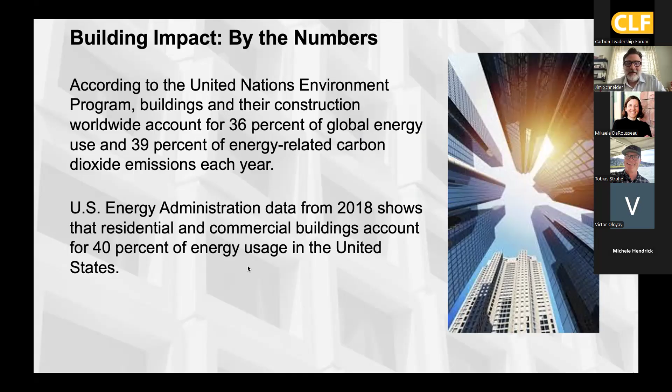We have lots of reason as a built environment to really be paying a lot of attention to our impacts, our long-term performance, and how we interact with the environment around us. The built environment has a significant impact on carbon, on energy, on materials. And so we really have to think about how we better use all those things in a way that is useful to the built environment of the future, but also works in harmony with communities and the environment.

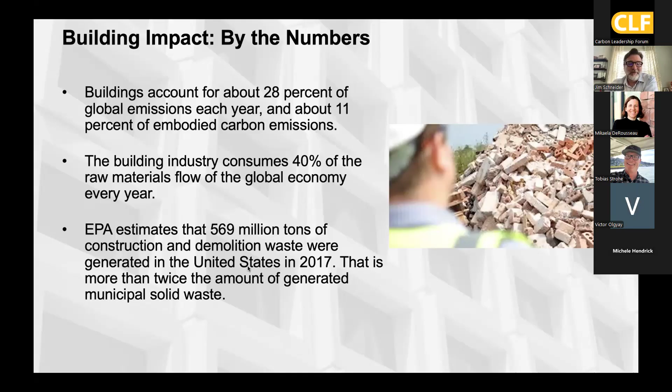Buildings account for about 28% of global emissions each year. The building industry consumes about 40% of the raw materials flow of the entire global economy. EPA has estimated that 569 million tons of construction and demolition waste were generated in the US in 2017. That's more than twice the amount of generated municipal solid waste in that time.

So for those reasons and many others, I think we have to think about buildings and materials a little bit differently. It's both in the initial impact of it and also the durability, the adaptability of the long-term performance. Statistics, just a few of them listed here that I'm sure are no secret to anybody out there. We are seeing an increase in severe storms and in fire damage to buildings. So buildings are facing more stress.

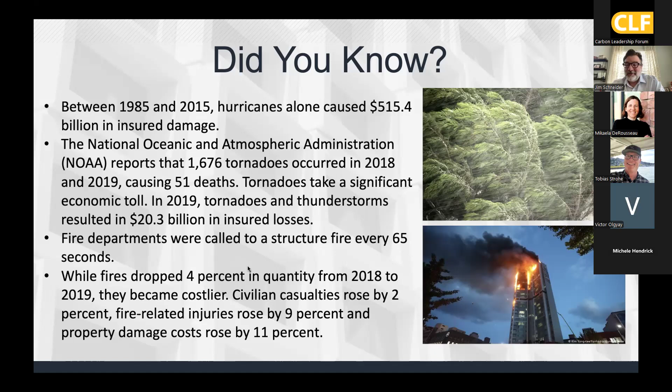And while they're doing that, the fact that buildings are creating this environmental impact through their energy use and through their materials is creating some of the environment for climate change, which is creating the environment for more severe weather and fires. IPCC reports in recent years show that as well.

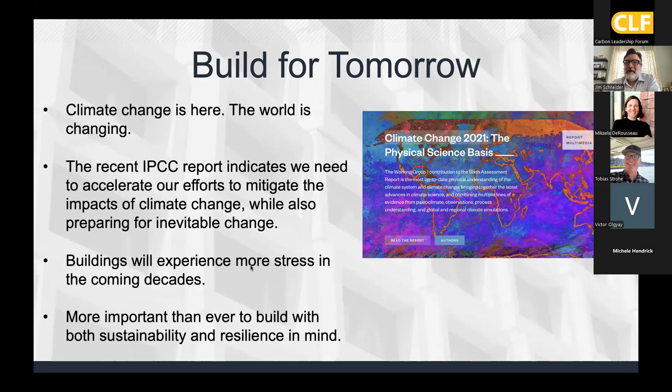So essentially, I think we have to really think about how we build for tomorrow, which is both taking into account how we mitigate the impact of climate change and also how we respond to what is already happening. We have to be thinking about climate adaptation and other pieces of the equation, as well as trying to mitigate our impact.

So some of the ways that precast, pre-stressed concrete can help in a sustainable design, and I'm somebody who believes that it's really the design and how you utilize materials is a big part of the equation on what makes a building quote unquote sustainable or resilient. And so there are benefits and attributes of precast and of concrete broadly that can really help in a sustainable design. And some of them with precast, pre-stressed concrete are the fact that it is an offsite construction method.

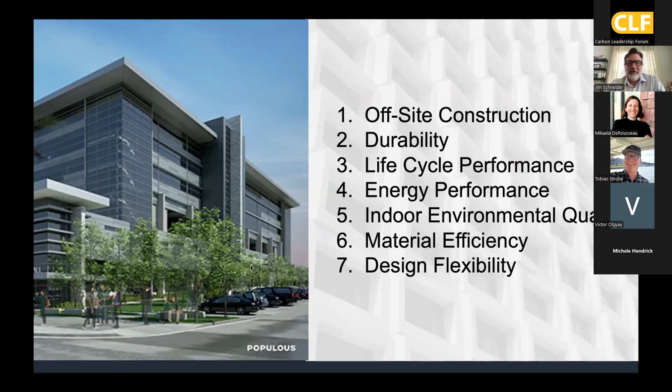So there's a lot of efficiency there, very durable and long lasting life cycle performance. So you get some of that long lasting, resilient, adaptive type of performance. Good energy performance, good indoor environmental quality, material efficiency, and design flexibility. So what I'm starting off with here is a few of the things that we've talked about as an industry for a while that are well-known benefits of using this type of material.

And one of those can be energy efficiency, particularly when we're talking about precast pre-stressed concrete. A common component we use is an insulated sandwich wall panel, which is where you have an interior and an exterior wythe of precast pre-stressed concrete with a layer of continuous insulation sandwiched in between.

So really, when we're talking about how we create energy efficiency in a building, it's by managing that thermal energy flow, that heat flow. We do that by using insulation, and then also by eliminating thermal bridges and making sure there's no metal going through the envelope system that creates cold spots that can lower the overall performance of the wall. Make sure you eliminate air and moisture leaks. And as a bonus, with concrete, you can utilize the thermal mass.

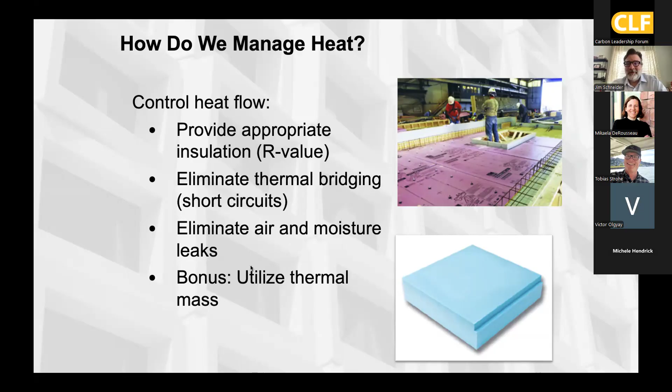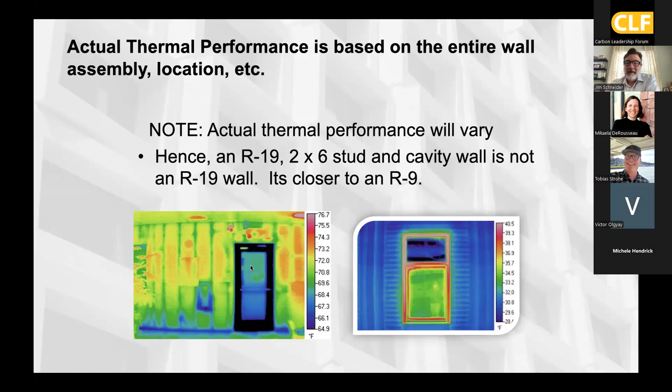Now, with a precast sandwich panel, we use non-conductive ties that hold the whole thing together so we don't get that thermal bridging. You have insulation built right into the system.

And then thermal mass, I'm just briefly touching on some of this stuff, and if anybody wants to go deeper into it, I'm happy to connect afterwards. But essentially, thermal mass is the quality of concrete where it acts sort of like a thermal battery. It slowly absorbs and slowly releases heat.

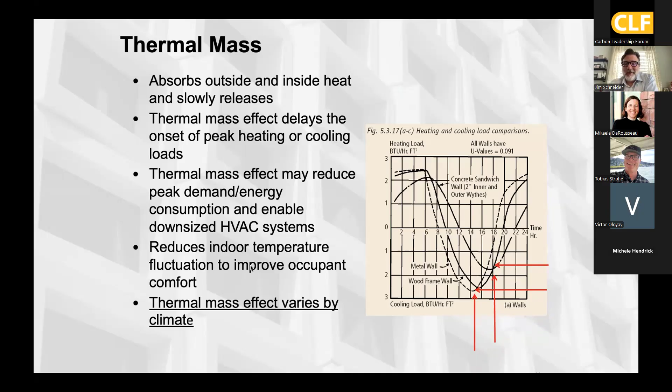So what it can do to the performance of a wall system is shove the peak heat load to off-peak hours for electricity, so it's cheaper. And more importantly, it actually makes the peak smaller. This comparative chart actually shows a few different wall systems, that smaller peak being a precast insulated panel. And so what happens is it creates more even temperature. The HVAC doesn't have to work quite as hard. So there are some physics benefits that you can actually calculate and factor in with precast.

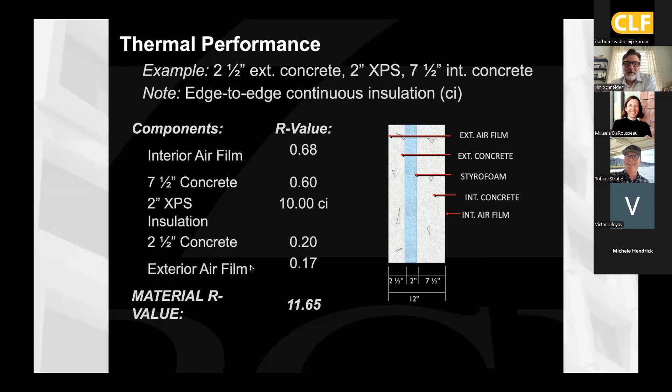And this is an example of a precast sandwich wall panel, what its material R value might look like. Because the material itself, whether we're talking about concrete, steel, wood, anything, doesn't really give you much insulating value. It's obviously the insulation part that does. When you add all these together just as individual parts, you get that material R value of 11.65 for this sandwich wall panel.

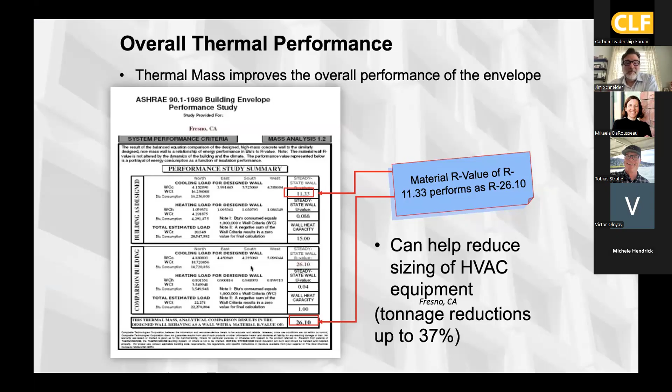And this is actually from a case study of a project in Fresno that utilized the sandwich wall panel much like that, and then ran the thermal mass calculation and showed that that wall actually performed at R 26.1 rather than the 11.33 of its material R value. So it almost doubled the effective R value of that wall. And in that case, they were able to downsize their HVAC by 37%. So those are some of the examples of how precast can be used in an energy efficient manner.

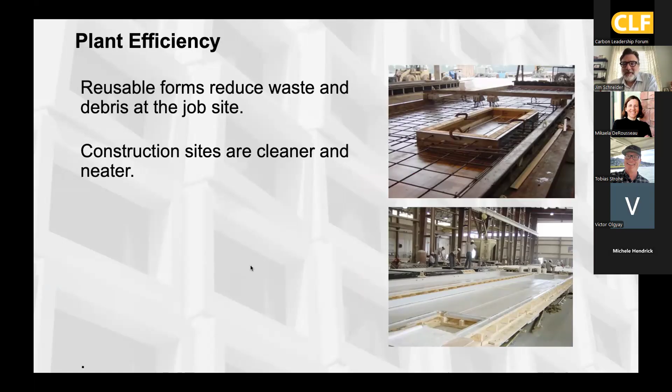It's also very materially efficient. As concrete goes, it is plant produced. So under very controlled conditions, where that comes to mix and just the amount of materials used, there's very little waste. So it creates cleaner, neater construction sites, a lot less room is needed for staging on the site. It's a very efficient off-site construction method. We use steel forms to cast structural products, so those are used over and over again. You get a lot of uses out of those.

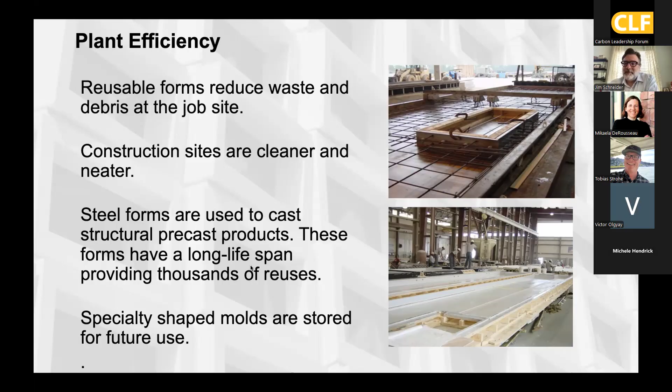Specialty shaped molds are stored for future use. It's usually amortized by how many pours we're going to have in a particular form, the type of material that's used, to make sure we get the most efficiency out of it for both economy and environment. It can be recycled and reused, crushed down and used for things like road base. And we're even seeing some work being done that I'll touch on later about trying to use crushed concrete as partial aggregate replacement in new concrete.

But we can also be engineering for adaptive reuse of components as well. And one really cool example of that was the Olympic Stadium that was built in Atlanta back in the 90s for the Olympics. It later became Turner Field. But they actually designed it with a number of riser sections that were designed to be removed after the Olympics and transported to local high schools for their athletic facilities.

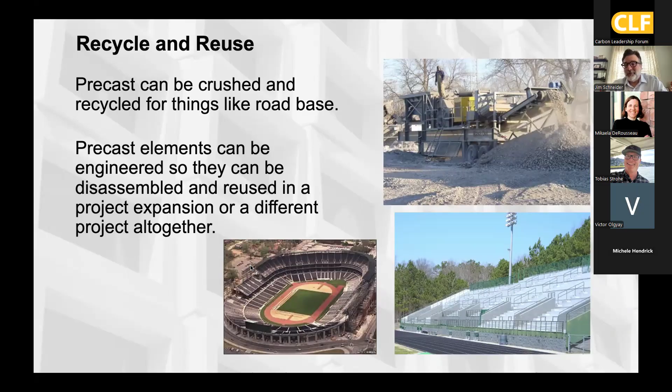So there's potential of doing things like that, or kind of future-proofing different designs for precast to reuse them, as parking structures that can be designed with certain floors to be retrofitted into office later, those kinds of things. So it offers some flexibility in that respect.

And then resilience is an important part of the equation. I think the more we talk about truly sustainable design, we're also talking about resilience. We're talking about climate adaptation. We're talking about a building that can stand the test of time and hold up against the conditions that already exist and that will inevitably become more severe over time.

So a resilient building delivers long and effective service life, provides safety and well-being to occupants, which is really the first responsibility of any building, can effectively resist hurricane and tornado force winds, earthquakes, fire and blast incidents, minimize disruption and recovery time, provide sufficient functional resilience to ensure continued performance even in the face of an environmental challenge or disaster, and provide benefits for insurance over the long term.

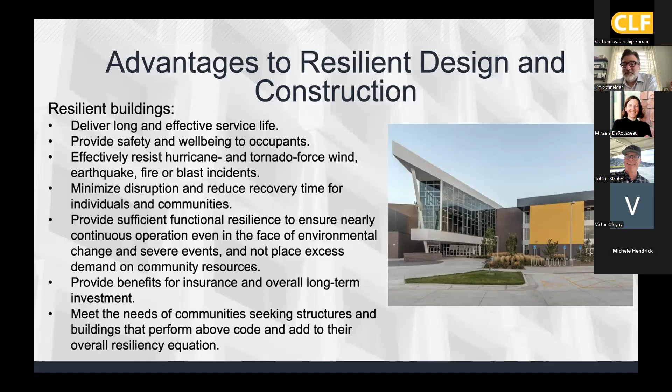And we're starting to see a shift in that industry and more demand for resilient construction, and meet the demands of communities that are seeking structures and buildings that perform beyond code, something that isn't just the bare minimum, but something that you can really rely on and use into the future.

So precast, pre-stressed concrete is a very strong, durable material beyond some of its initial upfront benefits. It just does last for a very long time. It stands up really well against fire, against storms, all kinds of things that can happen to a building.

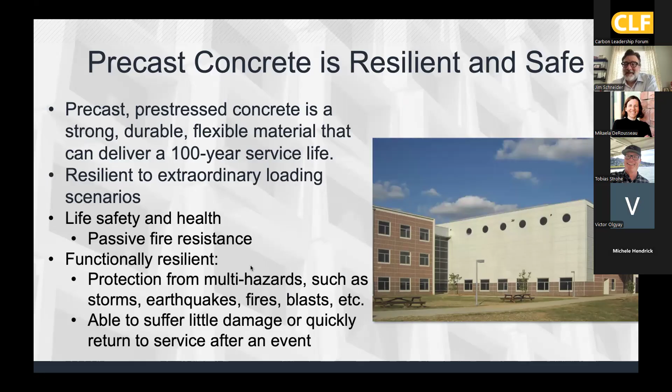In terms of storm resistance, we see it very often used for FEMA storm shelters, which sometimes have been built into school gymnasiums or things like that that can be part of a community design. So it is a very strong, durable material, provides excellent protection against high winds, storm surge in hurricane zones, different types of weather conditions that can affect it, which is why it is used in those types of designs.

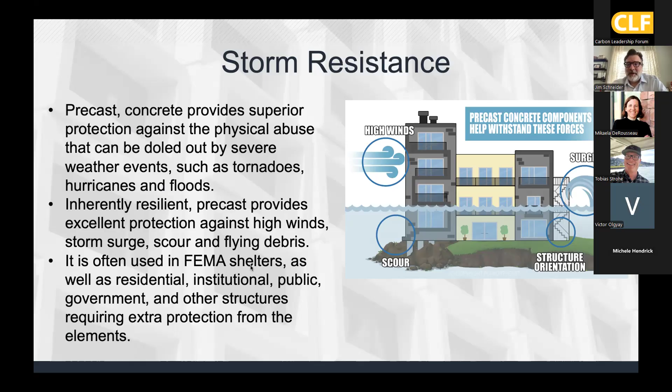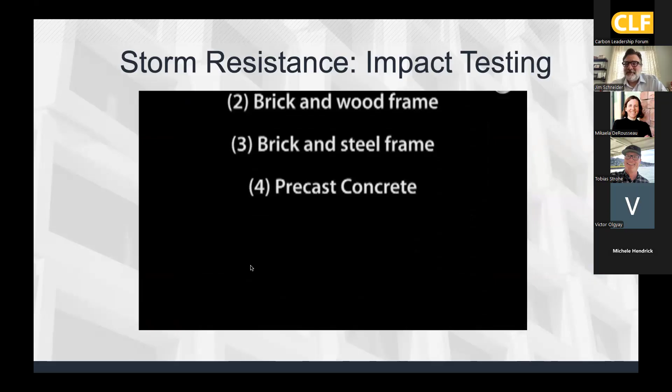And the kind of illustrative video that we have from the industry research that was done years ago in this area was that we did a wind cannon test to see what a couple of different wall systems would look like in the event of like an EF5 tornado where you have 100-mile or whatever it is mile-an-hour winds. So this was actually a wind cannon test shooting a 2x4 at 100 miles per hour through or at a couple different wall systems. That was a vinyl wood frame, and you can see it punctures that pretty easily.

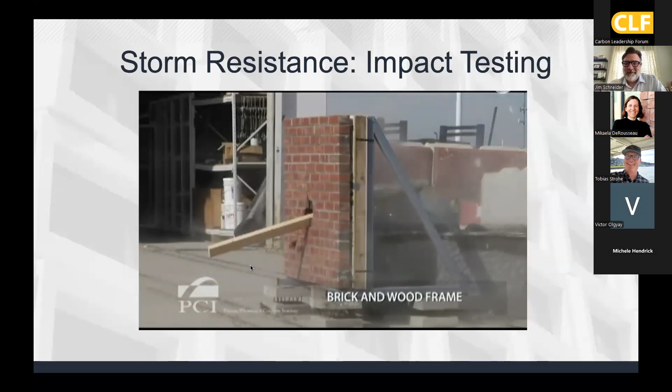Brick and wood frame. It also creates a little bit of resistance there, but still gets through and damages that building. And next is a brick and steel frame. Effectively sharpens the projectile and makes it more dangerous. So that's no good, but still doesn't stop it from penetrating the building. And then we have a precast insulated sandwich wall panel, and you can see how it basically just bounces off. Like if there's any damage to that wall, it's aesthetic and it's a touch up.

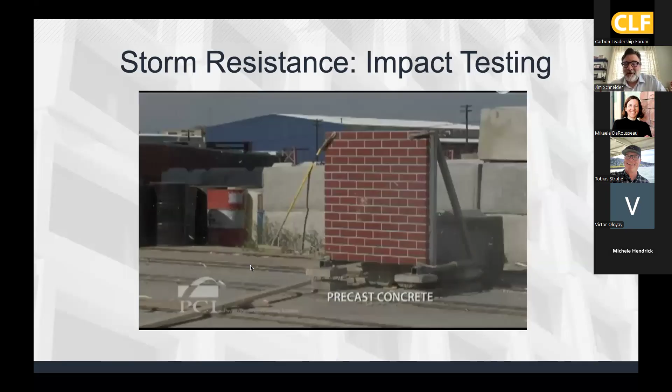So first of all, the people inside were kept safe. And secondly, the building's able to continue functioning, which to me is kind of the definition of resilience. Durability is the capability of a building, a material, a community, a person to take an impact, to take a punch. Resilience is taking it that next step and saying, can you continue to function? Can you still continue to do your job and move forward after that?

And one example of this, kind of the resilience and adaptability of the material, if anyone remembers the tragic tornado that struck Joplin, Missouri back in 2011, that was national news at the time. And it pretty much destroyed that town. It was a significant loss of life and property. But one of the buildings that did survive that storm was this 96,000 square foot Shopko. It was a precast big box space that really hadn't been used for a number of years. They were able to retrofit that into the new Joplin High School in just 55 business days.

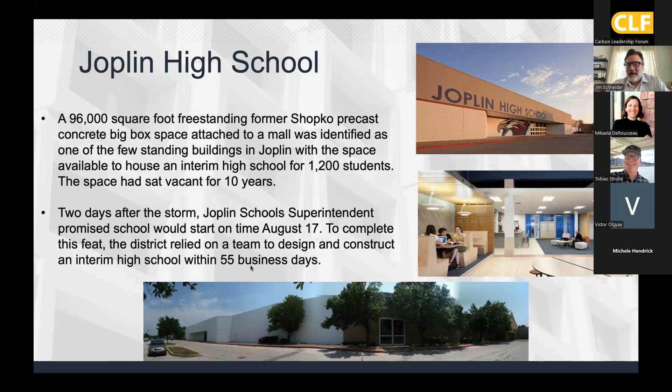So, to me, that's a story of adaptability. The material is able to change its use of that building pretty quickly and easily. And those students were able to return back to school on time. So that sort of is the true definition of resilience, where that piece of the community's activity was able to continue as normal in the fall in just a really quick amount of time. At least they had that piece of normalcy to cling on to. And the entire town was rebuilt in resilient and sustainable fashion after that.

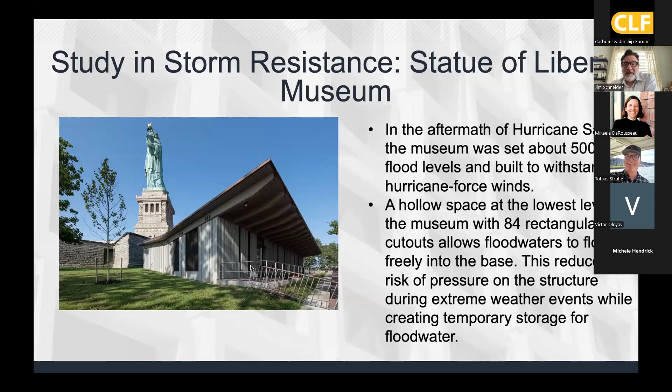Just another kind of interesting example of designing for climate adaptation and thinking ahead for the future is a Statue of Liberty Museum that was designed in the aftermath of Hurricane Sandy. So, a number of things they did here was set it above the 500-year flood levels. Hollow space at the lowest level of the museum has 84 rectangular cutouts that allows flood water to flow into the base, and that reduces the risk of pressure on the structure.

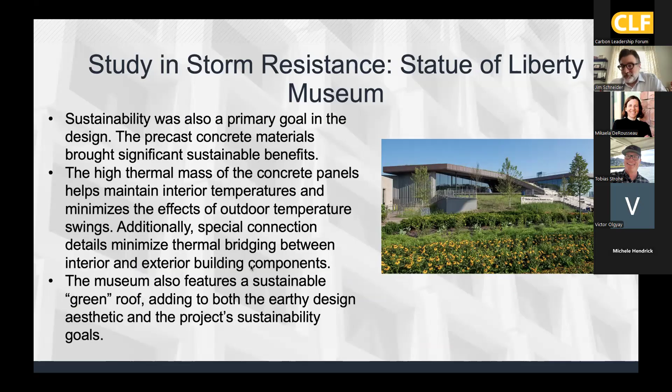Sustainability was a primary goal here, and they used insulated sandwich panels and thermal mass to achieve some of the energy performance they wanted. Also, a green roof, which precast was a part of that design as well. So there were a lot of ways that precast was able to help make that design possible, and it was LEED certified, and I'm forgetting which level, but it was designed both for sustainability and for thinking to the future and the kinds of weather that an East Coast facility like that is going to have to deal with over the years.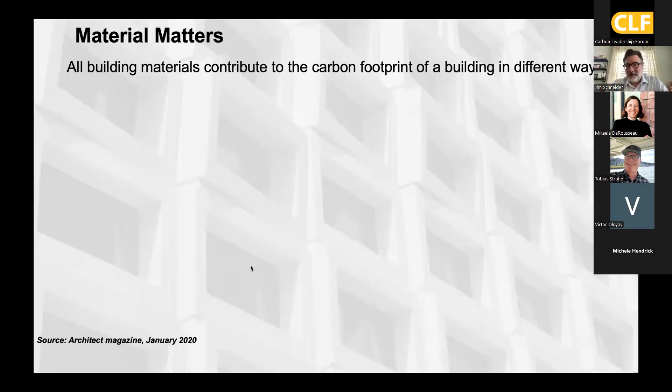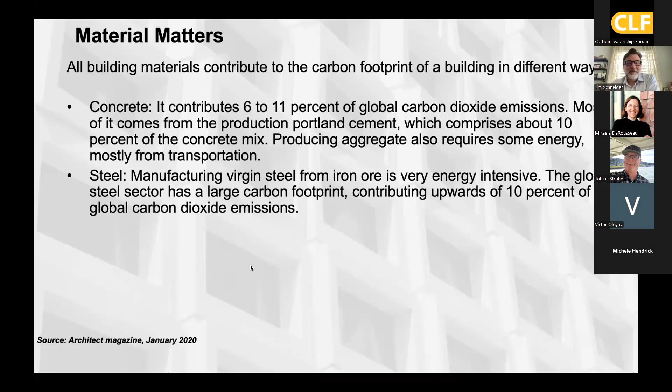And of course, we talk a lot about and have for many years about the long-term performance benefits of precast concrete. There is, of course, an embodied carbon element to it that is part of the equation. And really, materials in general do have impacts in this area. So we have to kind of think about the initial impact and the long-term impact. With concrete, the material as a whole contributes 6 to 11% of global CO2 emissions. Most of that comes from Portland cement. We're going to talk more about that a little bit later in the presentation. Steel, also very impactful in this area, about 10% of global CO2 emissions. Wood, it's a little bit more wibbly wobbly.

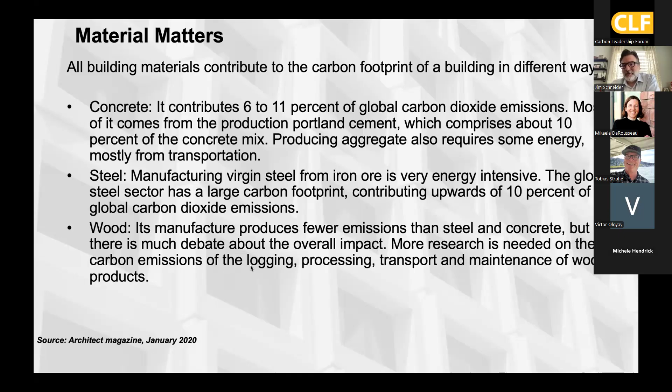There's less initial or easily trackable emissions, but there are things that come from biogenic carbon loss, transportation, and other things like that that are beginning to be identified. And this is just from a study from the International Institute for Sustainable Development that went into some of the difference between upfront and long-term impacts in terms of carbon from different types of materials.

And what you can see in this is obviously that light blue manufacturing impact is higher, with a higher carbon impact of concrete over wood. Construction a little bit higher as well. They start to factor in biogenic carbon loss with some of the wood products there, and that evens it a bit. And then you start to factor in the use phase, where approximately 95% of the impact of a building in terms of carbon and energy comes from its operation and its use over time.

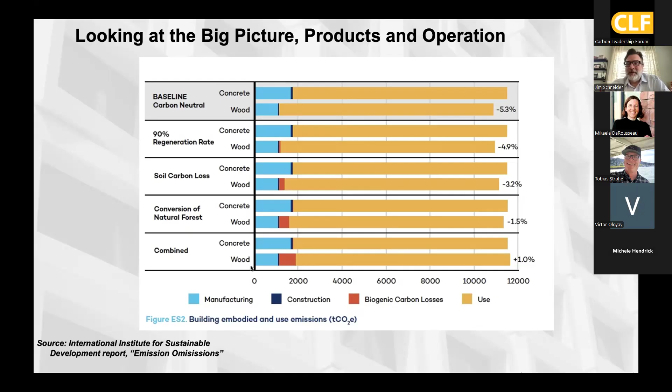So when you start to factor that in, there are benefits of a material like concrete that can, over the long term, balance the ledger a little bit. So essentially what it gets down to for me is that all building materials have an impact. It all has a cost. And how do we leverage that and utilize it the best way possible to get the long-term performance that we're seeking, as well as mitigate its impact up front.

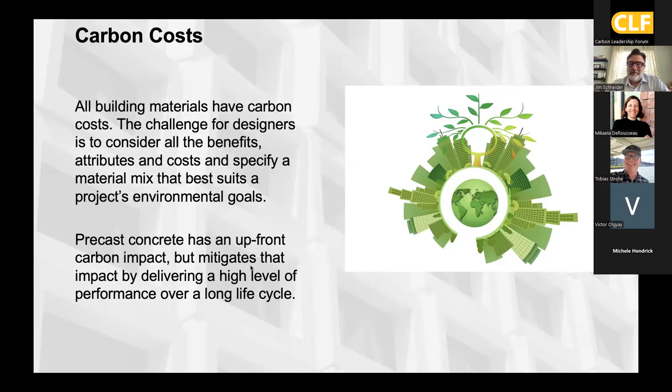Precast and concrete as a whole does have an upfront carbon impact, and that is somewhat mitigated over the life cycle by its performance. However, that being said, we also recognize the importance of doing something about the initial embodied carbon and trying to change the metric there and bring down that impact so that it can perform even better and be an even more impactful building solution for us into the future.

So next, I'm going to talk a little bit about where we are as an industry when it comes to reporting and transparency, and getting into the TLAs, as I like to call them, the three-letter acronyms: PCRs, LCAs, EPDs, and everything else. So where we are, there is, of course, overwhelming scientific evidence the Earth's climate is changing. We all know climate change is affecting the planet and we have a role to play in reducing the emissions. So why do we focus on concrete?

I talked earlier about the fact that the built environment, construction in general, has such an enormous impact by percentage around the world. This pie chart shows the different impacts from a carbon standpoint. Transportation, everyone always thinks about cars, but it's 23% versus building operations, which are 28%, materials and construction 11%. So it's a big deal. We have a big footprint, and any impact we can make in improving it really does change the dynamic around the world.

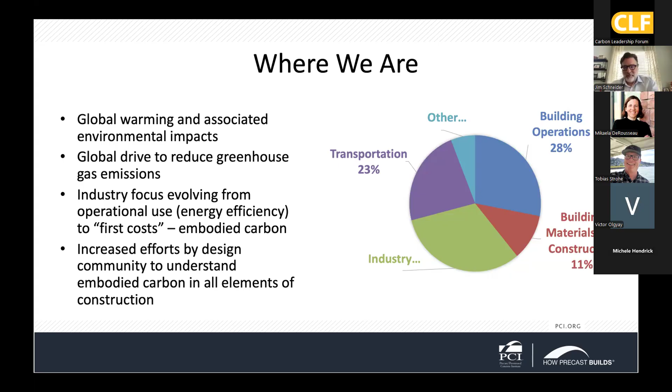So cement is the main driver of the impact of concrete. If we could have a magic wand and somehow make concrete without cement at all, that would be great. And maybe someday we'll get there. In the meantime, we are trying to find ways to use it in a more efficient way, to find ways to replace it that still give us the performance that we need and deliver the aesthetic, the versatility, the performance, and all those things that we want to see in concrete too.

So in the current state, we are seeing an evolving awareness and focus on how we even think about buildings and how we think about quote unquote sustainability, which is a term that's kind of going out of fashion. And that's maybe not a bad thing, because we really can think about what is the most effective way for us to build. I don't think we're ever really going to move the needle super far by trying to make it an altruistic thing. What it really is about is doing buildings better, doing business better. How do we do it more efficiently, less impactful, and coming at it from that direction?

So we want to understand the environmental impacts of our material and our industry, especially where cement is concerned, and figure out how we work that. And the perception of concrete is a notable thing. I run into this all the time. There's plenty of folks who just think concrete on its face is bad, and there's plenty of reason to think that, but there's also plenty of reason to think that it has a really important role to play. There's also a lack of clarity on the differences between different types of concrete, because there are different types of concrete, and how we use them and how we create them.

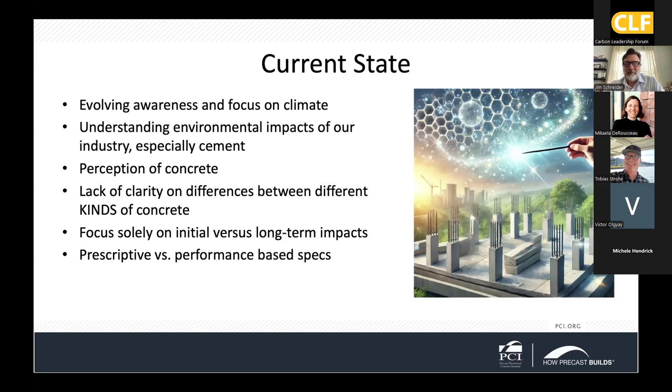Focus on initial versus long-term impacts. Both are important, but we really do have to factor the whole thing into the equation. And then prescriptive versus performance-based specs. We as an industry really think there is the benefit of performance-based specs, which is getting to that point of saying, here's how we want it to perform, and then we'll let the producer or designer get to that point the way they need to get to it, rather than setting the actual material targets that may not be relevant or may actually be a hindrance to getting to the kind of performance you want.

There are lots of industry efforts to decarbonize cement. Portland Cement Association has released a roadmap to carbon neutrality. Global Cement and Concrete Association, CLF, right there. And our own industry, PCI, has been putting a lot of effort into this for a long time. I worked at PCI National back in 2004, and I want to say it was maybe 2006 that we formed our first sustainability committee there.

That has really taken on a new life in the last several years and has become very active at a board level, even in our organization, where it's kind of become a priority all across the board, which has been part of our big push to gather industry data and EPDs and have this transparency. So we as an industry have invested a lot of time and energy into producing EPDs, tracking carbon and talking about sustainability among ourselves and to the outside world because the market demands it.

Policy environment is requiring it. Architects and engineers are looking to design lower carbon buildings. Owners and developers are setting climate targets and embedding sustainability into their governance practices. And governments at various levels are enacting buy clean policies that require EPDs. We certainly have that right here in Colorado.

Here in Colorado, we can take pride in the fact that we're the first Department of Transportation in the country to have required EPDs, and we're a leader in many ways here. So it's been a good inspiration for our industry to respond to that and really push forward on getting a good state of where we are. And then, from there, we can build on where we're going to go.

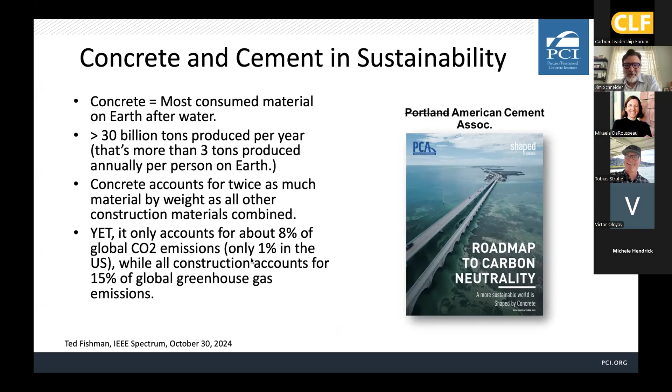Concrete accounts for about twice as much material by weight as all other construction materials combined. Yet it accounts for only about 8% of global CO2 emissions. So part of that big number in emissions is from the fact that we just use so much of it. So once again, being able to change the mix on that and get to a better place, any improvements we can make in concrete can make a really big difference worldwide.

So talking about an EPD, I'm sure most folks here are probably familiar, but just in case you're not, the process essentially begins with a product category rule, or PCR, which sets the rules, calculation requirements, and guidelines that get you to a life cycle assessment, or LCA, which is the method to assess the environmental impacts across a product's life cycle. That gives you just a ton of data that is really kind of difficult to make sense of. And so that is boiled into an environmental product declaration, or EPD, a third-party verified, internationally recognized label that has a public disclosure of life cycle environmental performance based on that LCA.

So let's take a look a little more closely at what's measured in an EPD. Most published EPDs follow what's known as an A1 through A3 scope. You'll often hear this referred to as cradle to gate. That means capturing all the environmental impacts that occur from the time the raw materials are extracted, for us primarily cement, aggregates, and steel, all the way through to the end when you finish the precast element and it's loaded for shipment at your plant, which is the gate.

So that scope includes A1, which is raw material extraction and upstream production, A2, transportation of those materials to your facility, and A3, all on-site manufacturing and assembling processes, including batching, casting, curing, and any reinforcing work.

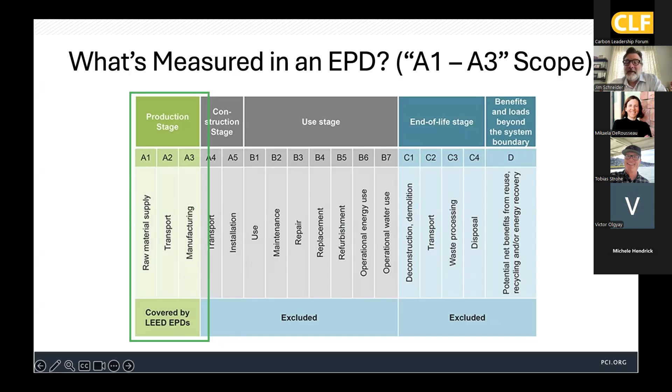And the A1 to A3 scope is where the majority of embodied carbon in most products comes from. For us as precasters, that's mostly the steel and cement that goes into the material. So how do we get to this raw material? This is where the LCA comes in. Each EPD is built from a complex calculation that models the environmental impacts of producing 1 unit of a precast product from cradle to gate.

How producers input real operational data: we have a tool that we're using as an industry through WAP that a lot of our members are using. A few others have done others. But it'll input data like how much cement, fly ash, slag, rebar, aggregates are used, what kind of energy sources run their plant, how far do materials have to go to get there. That all gets processed through the software and matched with a life cycle inventory database like EcoInvent, which contains upstream environmental impact factors for each material in the process.

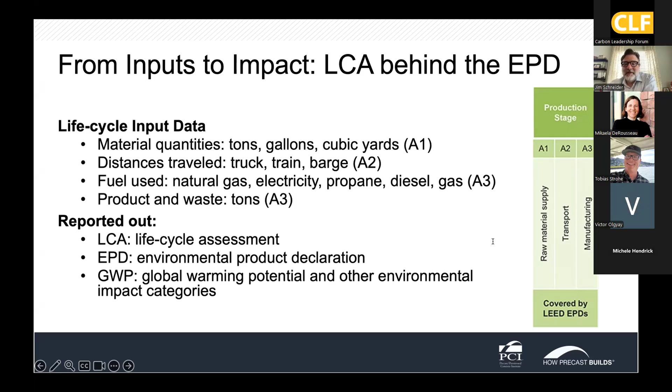So life cycle input, the result is standardized environmental indicators. You get global warming potential, GWP is what we're mostly talking about. Also, you can get into things like ozone depletion potential, acidification, different types of things that are studied in EPDs. So from national to regional, here's why that matters. We've recently released regional EPDs.

Now, historically, PCI had published one national industry average EPD for each major product category, which was a good start and it provided some transparency, but it was something we needed to build on because, frankly, the United States is a big place. Regional differences in energy sources, cement blends, transportation differences, and even production practices can vary dramatically. A plant in California using type 1L cement and renewable electricity is going to have a very different carbon profile than one in the Midwest using traditional grid power and traditional cement.

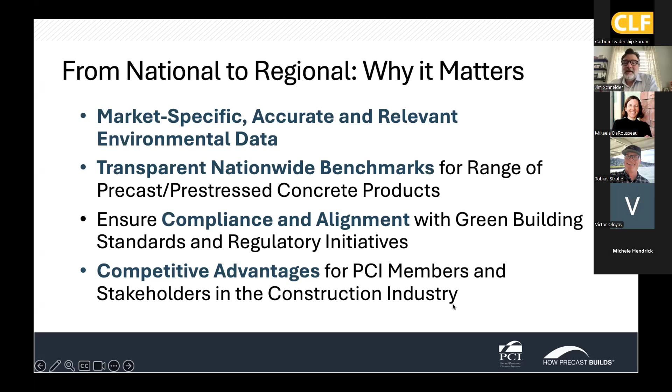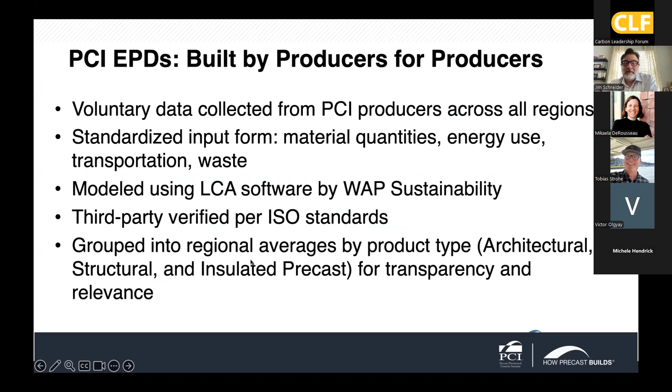So the national EPD, those being averaged together, really wasn't giving any real good picture to anybody. So by regionalizing it, we can create more accurate and meaningful benchmarks for where a place in the country actually is. And for us to build on, you have to first know where you are. So PCI producers, over the course of 2024, production data from member plants is gathered across all regions. In total, we had 64 producer plants participating in creating the 2025 regionalized EPDs and industry-wide EPDs.

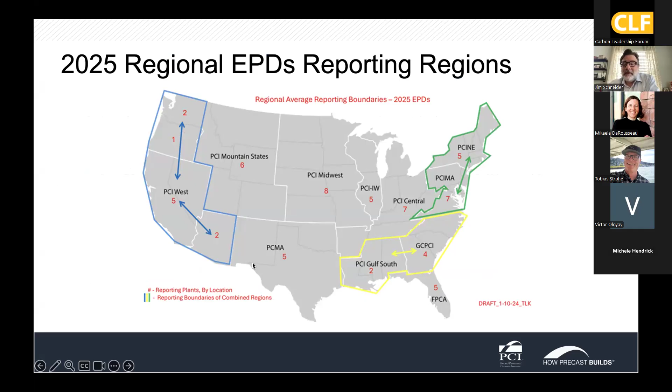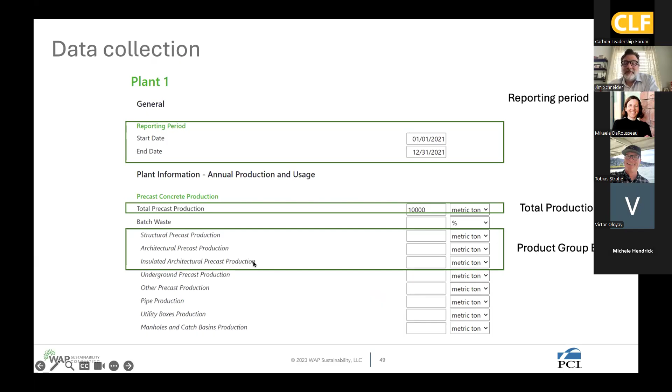And so now we just rolled these out in the last few months, and they're broken into these regions. So of course, we're in the PCI Mountain States region there that allows that breakdown to happen. So we have those regionalized EPDs within our area there, and then also many plants, including the ones here in Colorado, have their own EPDs. So this just kind of gives you a snapshot of what happens when producers are gathering this data. They have this software, they enter in all these different types of products and impact categories and things like this. I'm just going to kind of go through these quickly. And that's how the EPD is assembled.

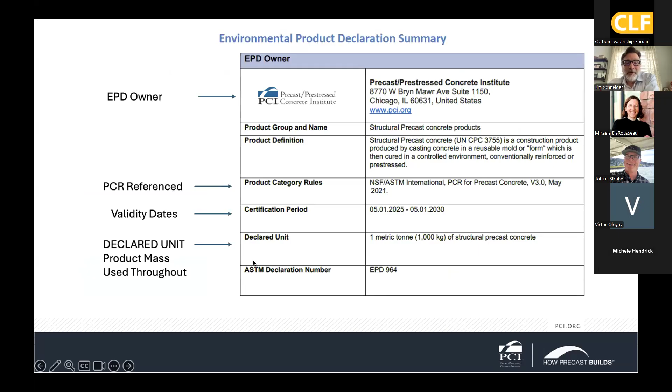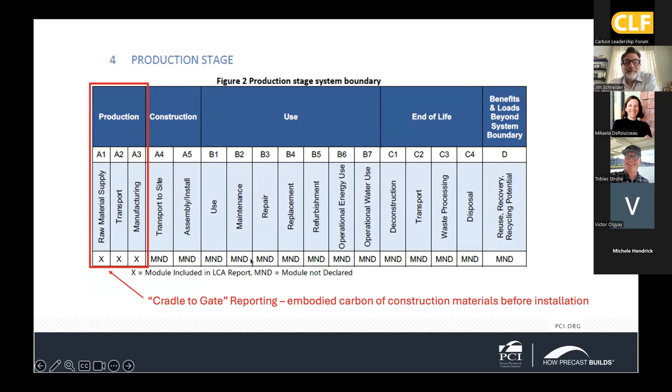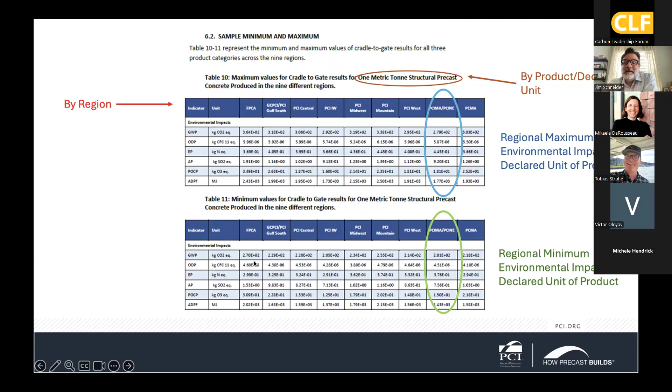Following the introductory section, the EPD then turns to reporting the emission impacts of the product. The first column on the left identifies the environmental impact being measured. After reviewing the environmental impact data for structural concrete in each of the regions, the EPD shares a table that summarizes the minimum and maximum values experienced in each of the regions, giving an idea of the variance within that region. That min-max report focuses on top-line environmental impacts.

So now we've seen how the producer data flows in. What does this all tell us? This is where the real value comes in, being able to make sense of what any of this data means. So, for example, we can see which materials and processes are contributing the most to global warming potential, and then compare those patterns across regions and start to build strategies that can improve our performance over time. So this is why getting this information and baseline matters.

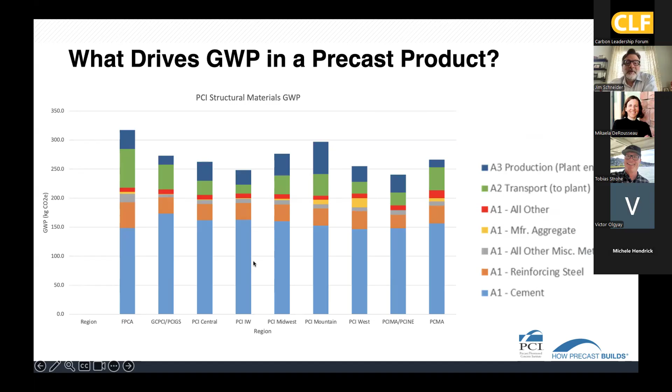This chart is based on data contributed in our own structural precast EPD that breaks down global warming potential by material and process input categories based on weighted industry average. No giant surprise here. Cementitious materials, especially Portland cement, are the dominant contributor. Other contributors include steel reinforcement, aggregates, plant energy. So we have some of that data that shows us that. This is from the PCI Mountain States region specifically.

The A1 total: 70% of precast GWP is embodied in the raw materials we use to produce the products. Cement and steel alone account for 63% of the total GWP. Under A1, you'll see there's also manufactured aggregates. It's very little in some regions, more pronounced in others because it is energy intensive. It is specifically called out in the reporting.

It is interesting to note that natural aggregates as a material don't contribute much to the total. Rock and sand is not an energy intensive material; it's simply extracted from the earth, graded, and shipped. And it is in the shipping, how far it goes, where that impact is going to come from. A2 total in PCI Mountain States is 13%. A3 is the energy used in plants, and that comes up to about 19% in the region.

And that's just an example from another region, PCI Midwest, and their structural. So here, 74% of GWP is in the raw materials. Cement and steel alone account for 72% of that.

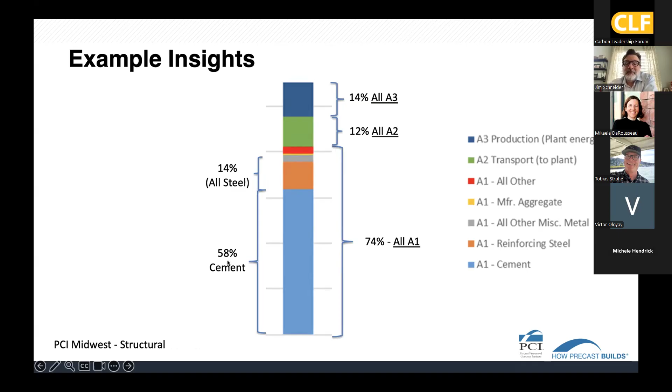How do we use these? Of course, LEED version 4.1 and also LEED version 5 request EPDs, so these are helpful in that. Also, just for initial benchmarking, communicating with design and project teams where we're at generally across the board, and not just our industry, but all, is getting an idea of what our baselines are right now, what's realistic, and then how can we improve from here.

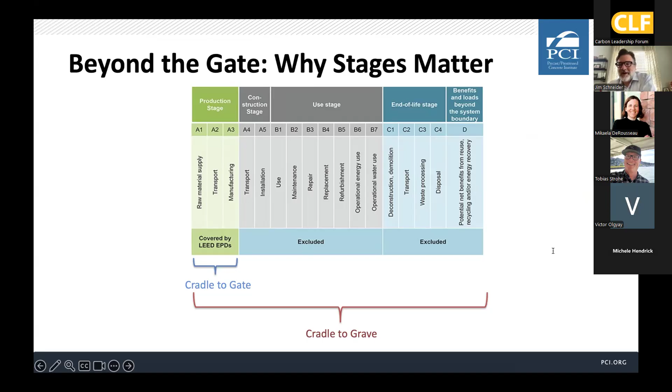And it's also important to think about cradle to gate and cradle to grave, how you're talking about something. Because if you're comparing two things and one metric is cradle to grave and one is cradle to gate, they're obviously going to be very different. So make sure you understand what it is you're talking about. And part of the reason that we're doing this as an industry too is because too often we were being lumped in with ready mix, which is a very different animal.

So just as an example, this is a slide that Emily Lorenz in our industry prepared for a presentation she did, and it represents an A1 to A3 snapshot of precast, showing all the things we've discussed going into that snapshot. Now, if you look at ready mix as a comparison, all these things come out of that ready mix. So that's not part of their overall equation. That has to come in different places.

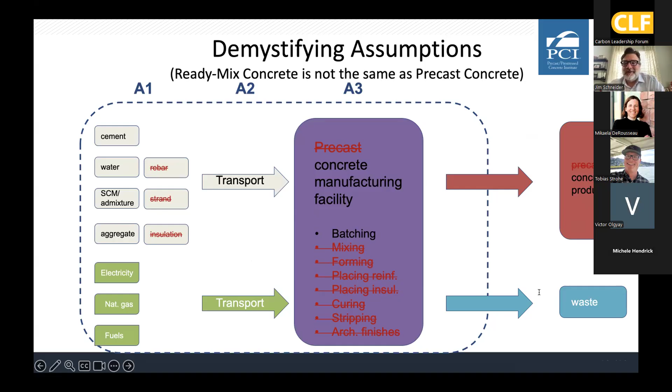So because precast is including the strand that's used in it, the reinforcement, the curing, it's a different process and different materials used. So we wanted our own data so that we could be baselined and compared to our own type of material and our own process, rather than being Frankensteined into a different process with ready mix or a different type of concrete.

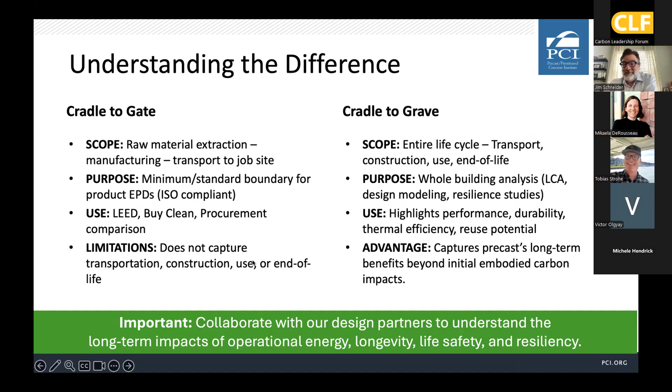Again, I talked about the difference in scope. Cradle to gate is just that actual production right up to the point the product goes out. When you're talking cradle to grave, then we're getting into shipping to the job site and construction and performance over time, operation, maintenance, all that stuff, and end of use, end of life as well.

So what's going on ahead: there was a meeting just today, I believe, for our new PCR, which is under development, the new product category rule update. That's going to be taking effect next year at some point. So our industry is getting together on revising that for the future. And so that's where we are as an industry right now, as a right now snapshot.

We do have good regional data. We have some good plant specific data, and we're finally creating a good framework to be able to gather that and be able to create that kind of transparency that the industry demands at this point.

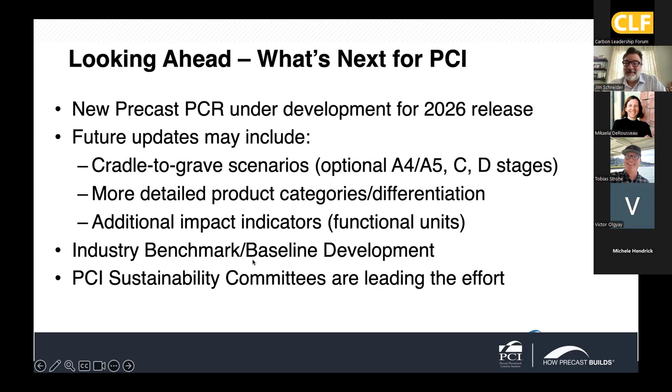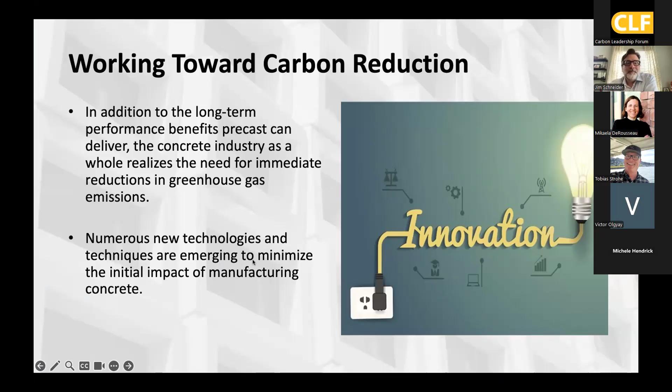What I also want to talk a little bit about quickly is that we are making an effort as an industry as a whole, whether that's precast concrete, the cement industry, ready mix, all of the concrete industry as a whole, to figure out ways to reduce the cement use and impact of concrete across the board. So some of the innovations that are in the works, some of which are in pretty common use already, others of which are just kind of being scaled up and studied, are really about maximizing the long-term benefit of the material by addressing the fact that cement is the real upfront carbon issue.

So how do we better use it? How do we use less of it? One goal of us is just to try to use less cement, and that can be through more effective mix designs, but also supplementary cementitious material, which we're going to talk a little bit about here. But then another method is to offset or mitigate the carbon emitted. We have some techniques that we're seeing for that. And then also just to increase the strength while reducing material use.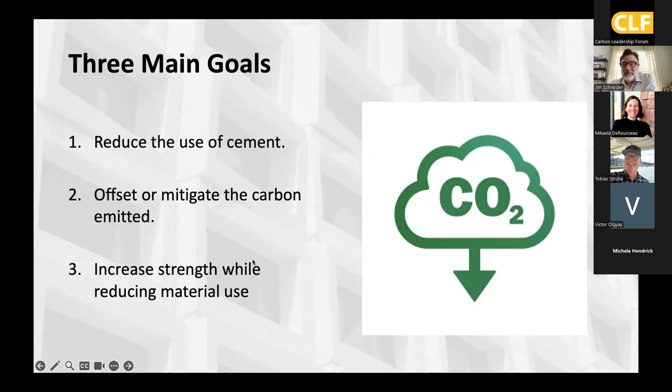So do more with less, which is part of where precast can really be an effective material for certain types of design, because it is so specific. It's plant produced and has the pre-stressing in it, so we can do more with less in terms of spans and things. So some of the things we're doing is trying to adopt less impactful versions of cement. So adoption of Portland limestone cement, or type 1L, and that can bring down the impact already.

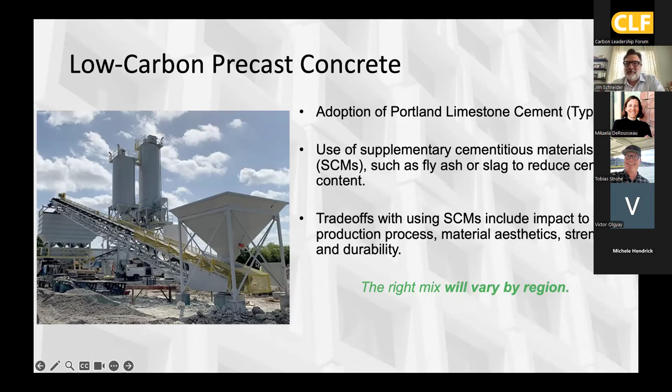Using supplementary cementitious materials such as fly ash or slag in replacement of percentages of cement can also make a difference. And then trade-offs with SCMs can include impact on the production process. So it's something you have to talk to your precaster about, how much of an SCM you can use, what kind of impact it's going to have on the cure time or on the aesthetics or on the performance of it. This is where things do move at sometimes what seems like a slow pace within the industry.

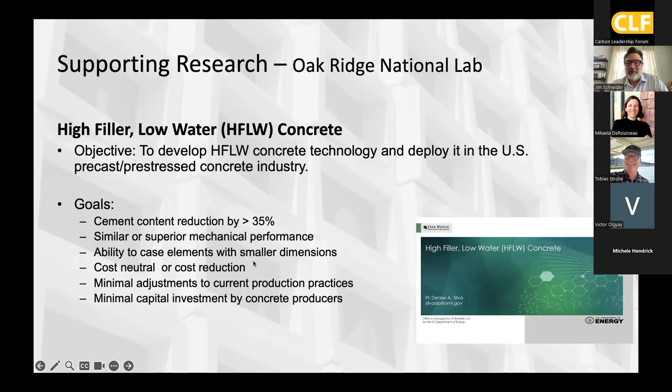It's because we have stuff that we know can effectively replace cement and have less of a carbon impact, but we need to also make sure that the performance, the strength, the curing time, and all the things that we need it to do are still there. So there's kind of that push pull between innovation and engineering to make sure that we're checking all the boxes there. So lots of great research going on and some different cement improvements that are already kind of being phased in. Portland limestone cement being a really good example because it's already becoming fairly commonly used.

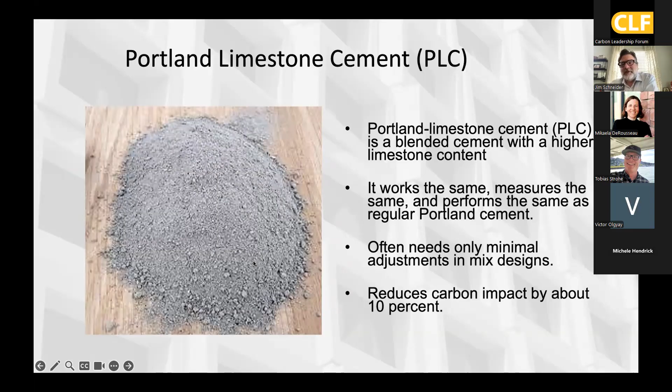It's a blended cement with a higher limestone content. Works pretty much the same as Portland cement, at least in theory. It's a pretty much one-to-one replacement. Often needs only minimal adjustments in mix designs. This can reduce carbon impact by about 10%. And we're seeing lots of producers in different parts of the country beginning to use it. There's always a little bit of kind of working around to make sure that the mix designs hit what you need it to do. Anything different is going to take a little time to adapt to. But it's a fairly low hanging fruit in terms of what we can do for some initial reduction.

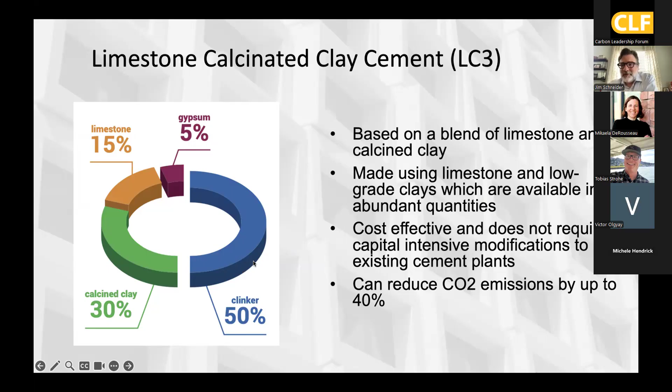Something else that's in the works that's maybe a little further down the line for common use is what's called limestone calcined clay cement, or LC3. This is based on a blend of limestone and calcined clay, made using limestone and low-grade clays, which are available in abundant quantities. Cost effective, doesn't require a lot of capital intensive modifications to existing cement plants. This has the potential to reduce CO2 emissions by up to 40%. A little bit more complicated to figure out how to best use it in mix designs, particularly with precast. So it's something that's around and being examined, but not in as common of use at this point.

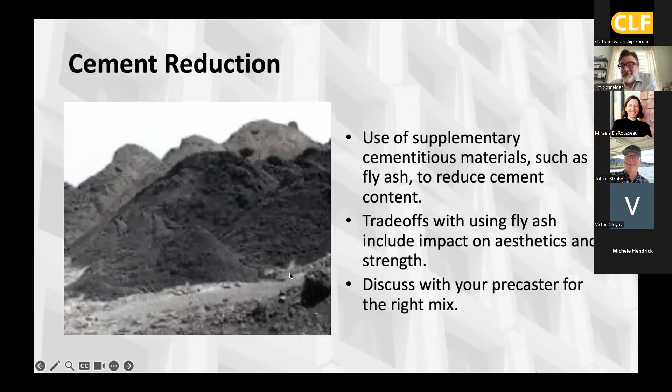Now, using supplementary cementitious materials is something the industry has been doing for a while. Fly ash is a very common example of that. It's an industrial coal byproduct essentially, that is used in replacement for percentages of cement. Another material that's used as an SCM is slag cement, a glassy granular material formed from iron blast furnace slag.

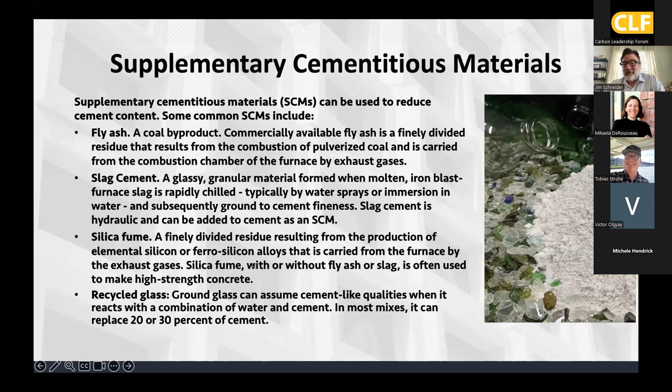Silica fume, and recycled glass. Crushed glass pozzolan is used as a supplementary cementitious material in some projects that we've seen even around our region. Some other innovations in SCMs are some cool stories of innovation and research that are going on. Basalt cement could be a more environmentally friendly cement than Portland limestone or Portland cement because it doesn't release carbon dioxide when ground into cement powder.

Mine tailings. The Colorado School of Mines successfully developed a laboratory-based technique for utilization of mine tailings for production of lightweight aggregates for use in the construction industry and has achieved the proof of principle milestone. Biomass upcycled in lignin for decarbonizing energy-intensive materials is a research effort by NREL and the Department of Energy using lignin, an abundant waste material from pulp and paper products, in replacement of cement.

Microalgae. There's even some research being done, and I think some of it here in Boulder, for using this particular type of microalgae that actually grows limestone in the way that coral grows. So it's sort of an organic cement product, which is kind of an intriguing possibility.

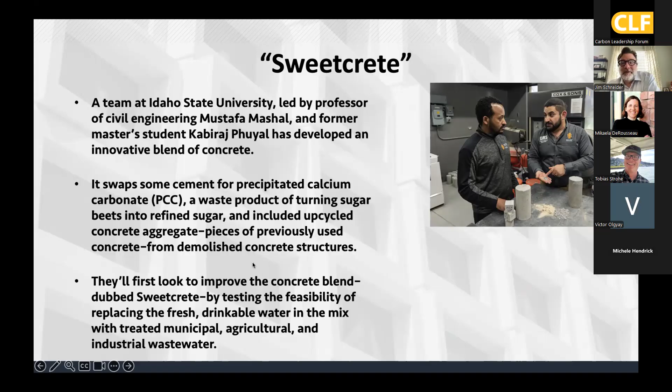One of the really cool programs that's going on within our region too is we work with a professor at Idaho State University who is involved in a project called Sweetcrete, which is using sugar waste products as a replacement of cement. They're actually in some pretty interesting grant funding right now and doing some work with DOTs. They want to use artificial intelligence to really optimize the concrete mix.

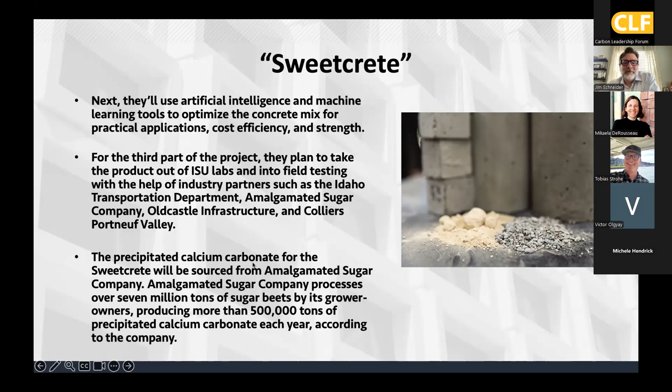And for the third part of the project's work with the Department of Transportation in Idaho, they're working with a sugar company for the materials. It's an interesting potential circular economy approach to using a waste byproduct from another industry as replacement for cements in concrete. So there's some interesting things happening that we're hoping to see scaled and successful down the road. So lots of effort being put into finding ways that we can make effective concrete without using so much traditional Portland cement, which is the main driver of its carbon impact.

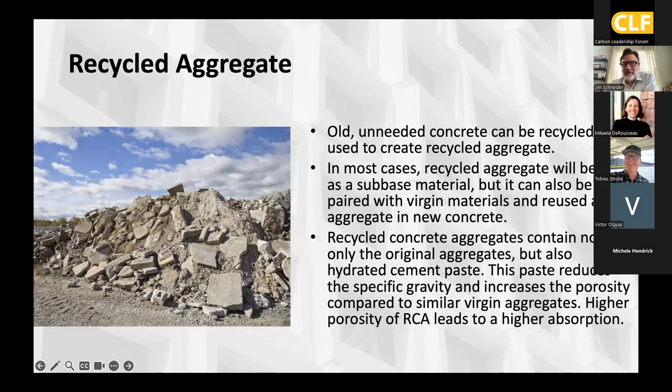Recycled aggregate. I mentioned briefly earlier that there is more research being done on actually crushing down concrete at the end of life and using a good portion of that as aggregate supplement in new concrete, because there can be benefits for that as well. I think I've heard of some mixes getting up to maybe 40% or so with crushed aggregate. So it's more of a cradle to cradle circular type of approach too.

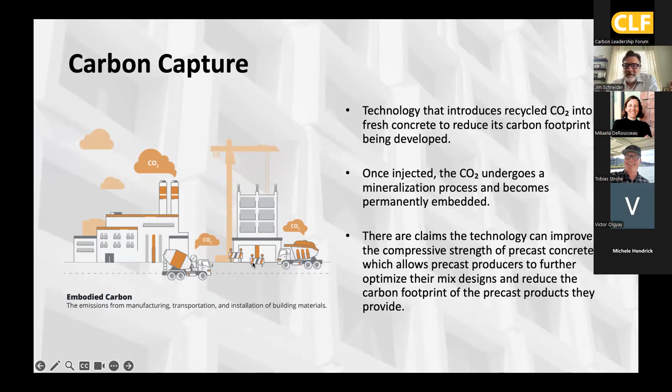And then there are carbon capture technologies, which you may have heard of. Some of this takes industrial waste CO2 and captures it and injects it into concrete, and it's said to have some benefits for curing and durability. And it's a way to sort of entomb or capture the CO2 that goes into the atmosphere.

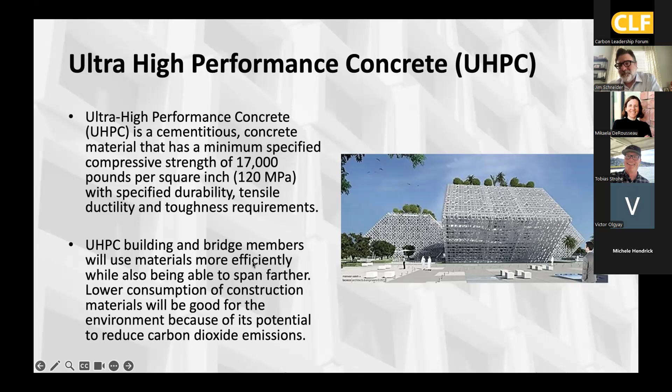And then ultra high performance concrete. In one of the earlier slides, I mentioned the idea of trying to do more with less and use higher strength materials that use less going into it. UHPC is an example of that. It has a minimum compressive strength of 17,000 pounds per square inch. It's twice or more as strong as traditional precast in that respect. UHPC building and bridge members will use materials more efficiently, be able to span farther, and have lower consumption of construction materials. So this is being used in some types of applications, and it's a cool new potential technology for us too.

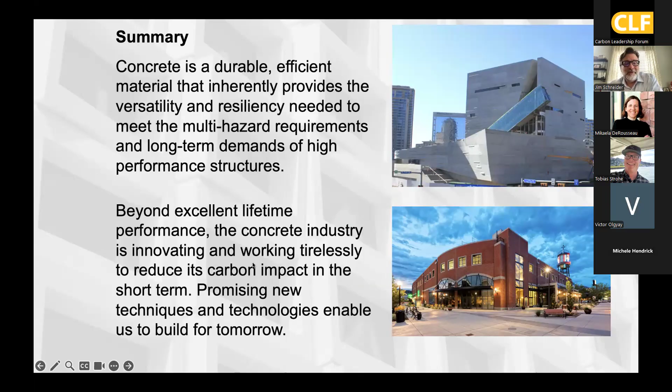So in summary, concrete is a durable, efficient material that inherently provides the versatility and resiliency needed to meet the multi-hazard requirements and long-term demands of high-performance structures. Beyond excellent lifetime performance, the concrete industry is innovating and working tirelessly to reduce its carbon impact in the short term as well. Lots of promising new technologies and techniques enable us to build for tomorrow.